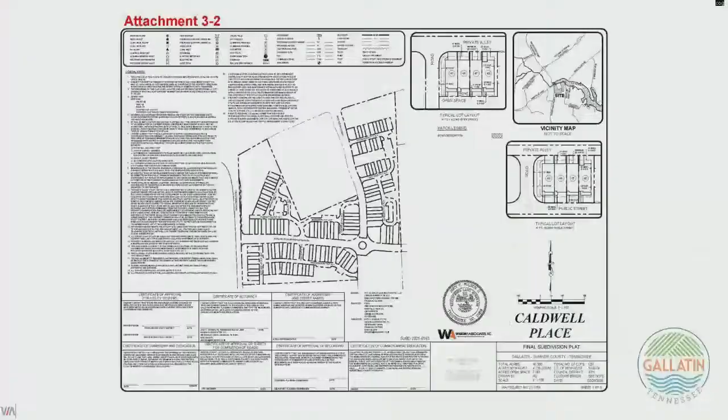Next, we will move to our regular agenda. This is item number 4, Bowman Massey annexation. Who has this one? I do. Thanks, Jillian. Yes, the owner and applicant request the Planning Commission recommend approval to the City Council to annex 129 acres with a plan of services. This is located west of Brights Lane and north of Roundtree Drive.

This property is along Broadway and is directly adjacent to Brights Lane. This property is contiguous to the current city limits based on when the Gregory property came in a few months back. The applicant is requesting annexation of the old family farm. The survey will be revised along Brights Lane to not include land directly around that and the creek, due to the urban growth boundary location. The city cannot annex outside of that area, so we're ensuring that's not included in this survey. I believe I received an updated survey just this afternoon, so we'll make sure that is updated for City Council.

Okay, this item will have a public hearing, and it will go to City Council following your recommendation. Thank you. Thanks, Jillian. Does engineering have anything to add? No comments from engineering. Thank you. At this time, we will open up a public hearing on agenda item number 4.

I'm representing the property, and if there's a question about where the urban growth boundary is, I don't know why it doesn't go up to the road, why it goes to the middle of the creek, because you're not going to develop into the creek, and we own the property on the other side of it. So take a look at where the urban growth boundary actually is and where it goes, and it would probably resolve a lot of your issues on that one. But nothing has changed from the last time this came up.

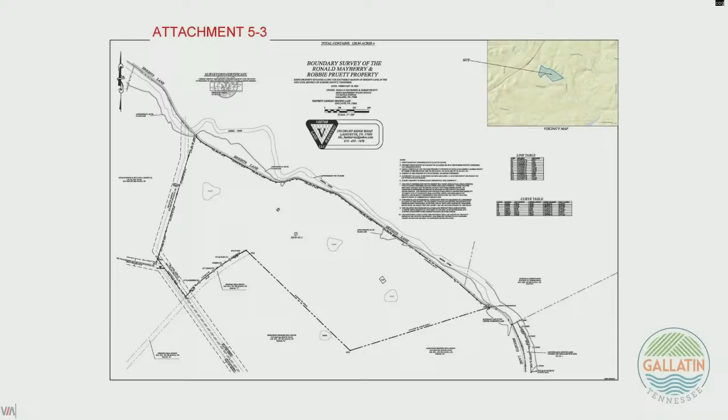Yes, sir, awesome. Jillian, does this one have a similar condition as the last one? It does not, because the creek doesn't come onto this property. Okay, so this one has no conditions.

Does the commission have any questions for the applicant? Motion, we have a motion for approval. Do we have a second? Second, we have a second from Tanner.

Again, like I said on the last one, this one falls in line with what we just did at the end of last year, so I'm also in favor of this. At this point, I will call for the vote. All those in favor, please say aye. Aye. All those opposed? Passes, thank you for your consideration.

Thank you very much.

Next, we will go to item number 6. This is Twin Ponds amended preliminary master development plan and final master development plan.

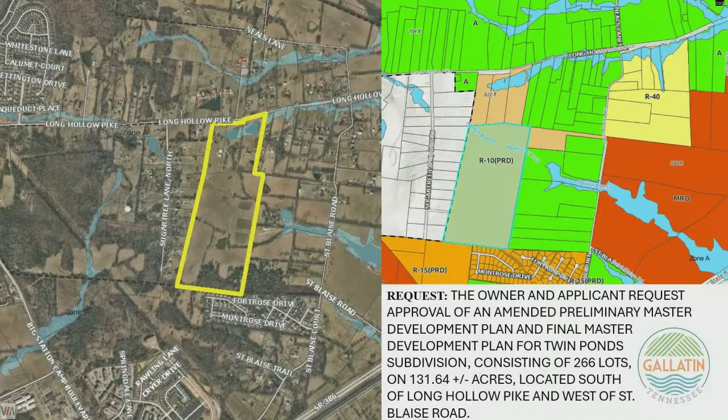Thank you, Mr. Chair. Jim Carpenter, staff planner. The owner and applicant request approval of an amended PMDP and FMDP for Twin Ponds subdivision on 131.64 acres, zoned R10 PRD, medium density residential planned residential development district, consisting of 266 single-family detached residential lots located south of Long Hollow Pike and west of St. Blaise Road. So the main change is these red shaded lots along Public Road A.

One of the conditions of approval for the PMDP was that lots fronting onto that road be side-loaded or rear-loaded. This current design has them as side-loaded, and so they need a little bit wider lot to accommodate the side-loaded development. It's an increase for these from 53 feet wide to 72 feet wide.

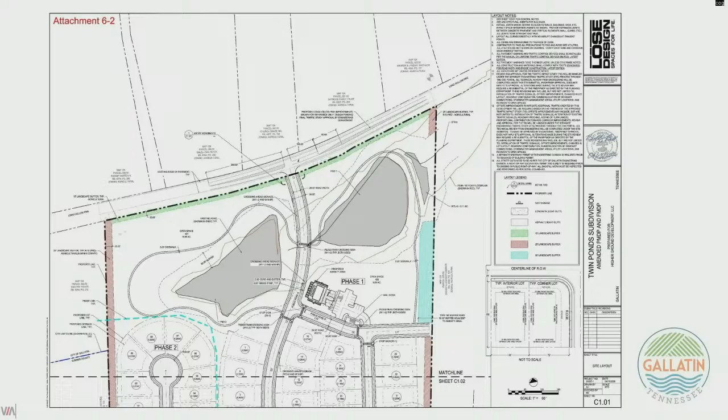One of the other comments we had: HVAC units cannot be located in side yards of less than 10 feet wide, that's a fire access issue. So they'll have to relocate the HVAC units to the rear of the properties.

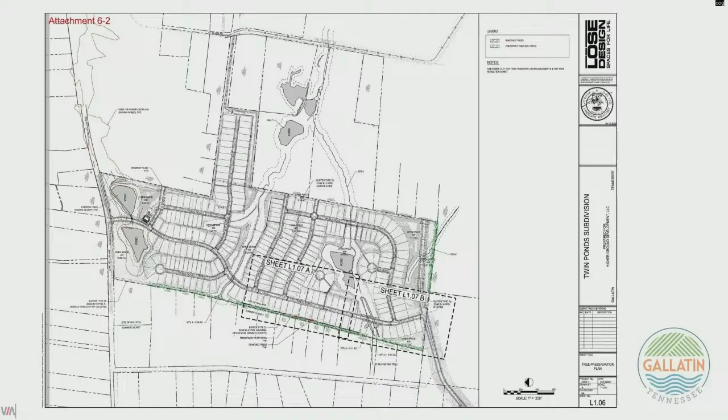Along with this, at work session we had just received the tree survey that day. So let's see if we can get this up. This is an overall tree survey for the west and southern property boundaries. They're showing about 490 trees, of those 11 are slated for removal, and it's very scattered, one here, one there. This is really the only spot where there's more than one in proximity.

And so the condition of approval from the PMDP said either retain the trees or place a berm. It's really not, from an engineering standpoint, feasible to put a berm for kind of one tree here, one tree there. So it appears that the applicant has gone down the route of trying to maintain the existing tree lines here.

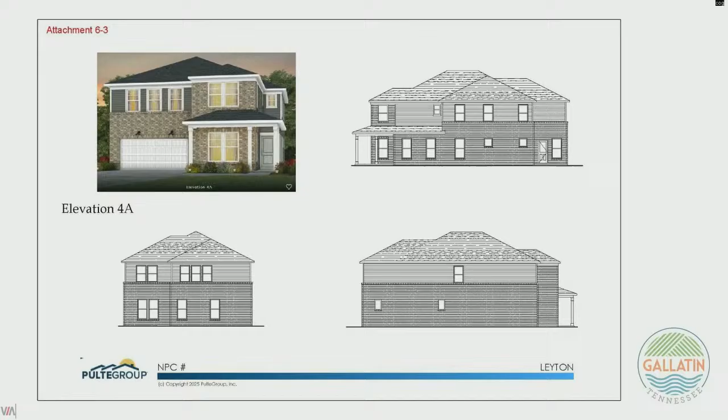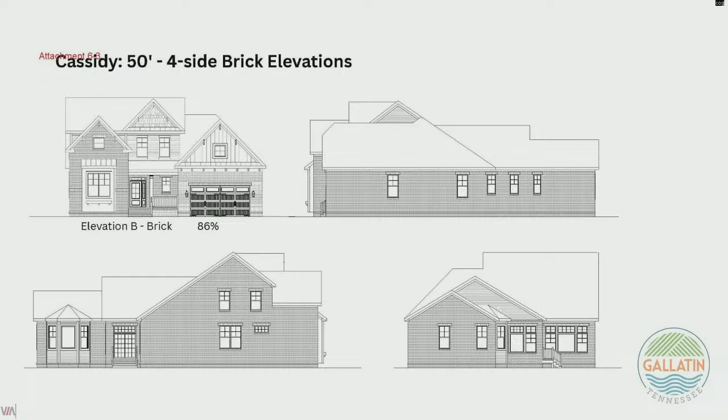Let's see, I talked about the architecture. So the plans indicate architecture that is consistent with the 70% brick stone approved with the PMDP. Any siding that will be on these units will be cementitious, so no vinyl, and there are some notes in there that call that out.

And then with that, since it is an amended PMDP, staff recommends that this be considered minor, since lots are getting wider and, in essence, it's providing a little bit more spacing. Our staff recommends approval of Resolution 2026-052 with 34 conditions.

Okay, and there will be public comment. Thanks, Jim. Engineering, would you like to add anything on this? Sure, so the traffic impact study has been all but approved. There will be some slight adjustments to what they're showing on Long Hollow Pike. Other than that, we'll see some ECPs, so we'll do a more thorough review at that point.

You said the traffic study is almost approved, basically. Basically, we're just waiting on signatures. Okay, all right, so this is a public hearing. Item number 6 is a public hearing as well, so at this time I'll open up a public hearing for those wishing to speak on this item. Please keep your comments to 3 minutes or less, it would be appreciated.

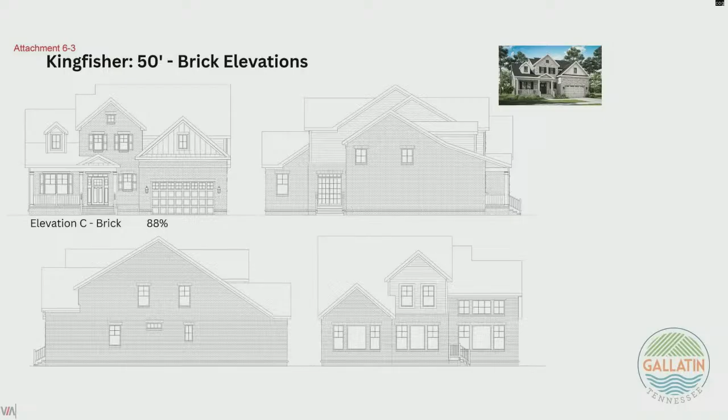Hello, James Mitchell. I live on 1041 Sugar Tree Lane. What is the starting date on this subdivision? Is there a starting date for the contractor?

So the plans say that they're going to start winter of this year, but it's winter of 2026 that's indicated on the plans. Okay, thanks Jim, all righty.

And I got something a little different I want to bring up. Why can't whoever raises the flag out in front of this place take it all the way to the top of the pole instead of having it 4 foot down from the top? Just something y'all need to talk about on that.

Okay, thank you sir. Is there anyone else wishing to speak on this item? Yes ma'am. Julie Poole, 1049 North Sugar Tree Lane.

Only thing I kind of want to talk about, we were nice, talked to the design engineer out there about some things we were concerned about. At the vote with the council, we brought up that Marty Cook got up and said that they were going to try to keep it where we couldn't see their houses, by doing the berm.

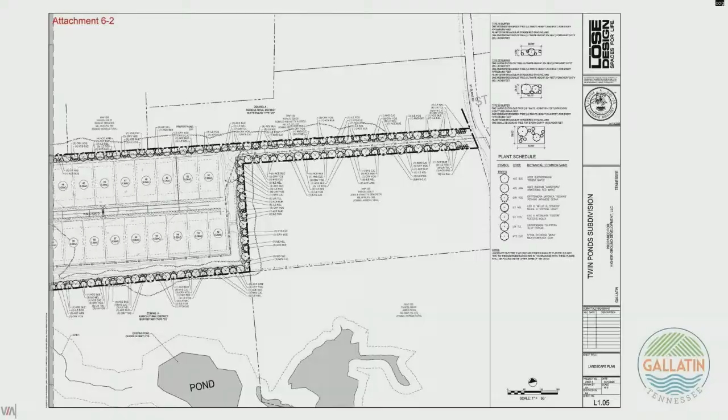As far as the tree survey, that was a condition during the city council process to look into, where applicable, a berm, retaining as many of the existing trees as possible. So what we had done was get a tree survey for the western and southern property lines, along Sugar Tree and then the St. Blaise Estates homes. We basically said, 10 feet onto our property we're just going to call it a no disturbance zone. So instead of being able to grade up to the property line, we're saying 10 feet from our property line we're not going to touch.

So that was the intent, and you can see it here: out of the 490 trees, 11 are coming down, so that's about 2%, doing quick math there. You were taking down 2% of the trees. And then behind that 10 feet is where we are disturbing.

We're then coming in with our proposed landscaping to provide more buffering there. And then I worked with Jillian a little bit on this one. I think the intent, correct me if I'm wrong Jillian, is anywhere there are currently openings is where they're going to really want us to emphasize the new buffering. Anywhere there's existing vegetation, we're hoping to utilize that as much as possible, and then come in with any additional buffering behind that.

Oh, and one more thing, because I know this was a hot topic through the approval process. As he said, a very small number of trees are having to be removed because they're dead or whatever. But I just want to reemphasize, the screening and the privacy is just as important to the developer as it is to the residents of Sugar Tree.

They're going to make a significant investment in both keeping the trees and adding landscaping where needed to make sure that screening's in place, because that goes both ways. The new residents buying these homes are going to want screening as well. So that's something very important, and the developer is committed to making that investment.

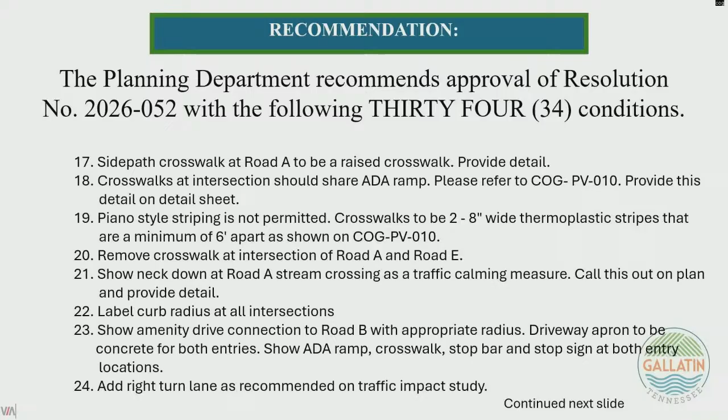Okay. So 16, 17, and 21 are all associated with Road A. Correct.

Engineering, do you guys see any issue with them working with y'all through the ECP process for that? I don't, necessarily, because I know Aaron and I have spoken about traffic calming a ton. They're still trying to figure out the best approach. There's also a discussion that has to occur with fire, to make sure multiple parties are happy with the calming measures. So that doesn't necessarily remove the condition, it just amends it for them to work with y'all through that construction document process. If you're comfortable with that, I don't see it being an issue.

Does the commission have any comments or rebuttals to that? If we remove it, how can we ensure they still comply? I don't think the request is to remove it. I think the request is for us to add language for them to work with engineering staff to come to a resolution on how they provide the traffic calming measure for the road.

Which is pretty much in line with some of the conditions we've seen on historical projects. So like on 16, it would be Road B, Road D, Road G, or work with engineering to come up with an alternate. That's how we'd prefer it to be written, as opposed to just striking them. I don't think we should strike them because the traffic calming needs to occur, but especially if there's additional discussion between the engineer and the engineering department, I think that's appropriate.

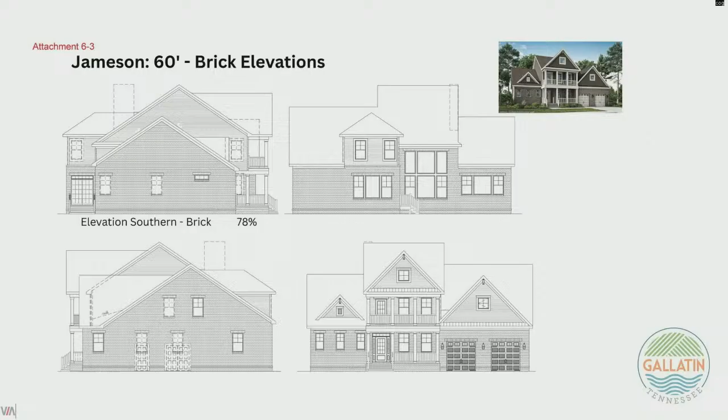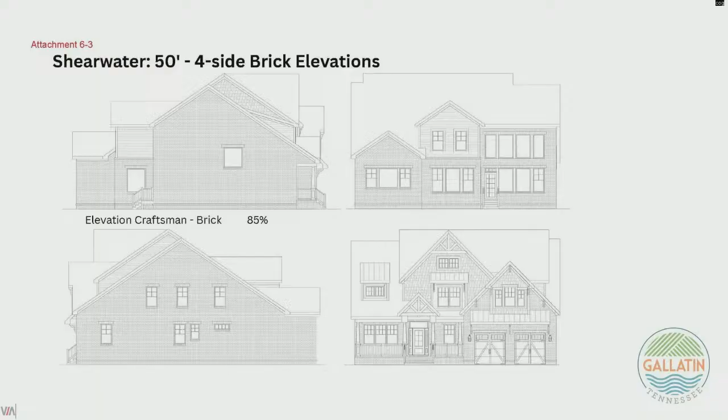It was just regarding the architecture for the side load products specifically. I know the previous submission had Pulte homes with the side load products, but I think the revised elevations now have Shell Brothers homes as a side load. Is that just how you guys had it, did you make a switch there, and was that the intent? Yeah, I don't think they're 100% certain on who it is, but currently Shell is providing the side load product. Okay, thank you, I just wanted that clarification, wanted to make sure we weren't missing some Pulte side load.

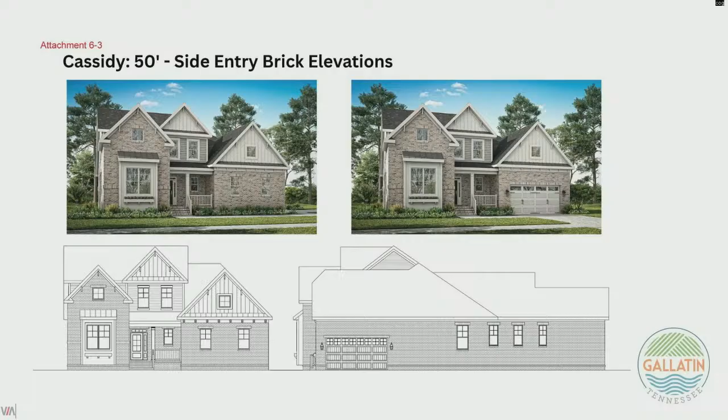But ultimately, from what I can see, they adhere to the requirements of the existing PMDP, correct? Correct, they did switch a lot of the materials to be brick and stone now, so they're meeting the 70% brick and stone requirement. After that, it's just a matter of making sure the submitted building plans match what's here. Thinking back, since this came through at the beginning of last year, when the previous project came through, were they meeting the brick and stone requirement at that time, Brian? They did, and it was a different builder they had originally submitted it with. We were excited, and then when we saw the previous submission for this application not having the brick and stone, we were slightly dismayed, but now that it's brought back to brick and stone, I think we're happy.

I did have one other question, brought up in the presentation about number 4 on the conditions, and that's the HVAC units not being on the side. Just wanted some clarification on that. Certainly understand the ordinance there, but wasn't sure whether there's any flexibility at all. It's important to these builders that they have a backyard outdoor living environment - that's a big thing for potential purchasers. Didn't know whether that was just hard and fast, or whether there could be staggered HVAC units if it's practical in certain places and still meet that requirement, or is that just absolute?

Yeah, that's a good question, Jim. Can you shed some light on that?

Yeah, so basically the zoning ordinance as written does not allow HVAC units in 5-foot side yard setbacks - anything smaller than 10 feet, yeah, can't have an HVAC unit in it. And that's for fire access to get to the back. 10 feet on each side is 20 feet. If you encroach 3 feet, 5 feet, you still have room to get back in case you have to get people out of the back of a building.

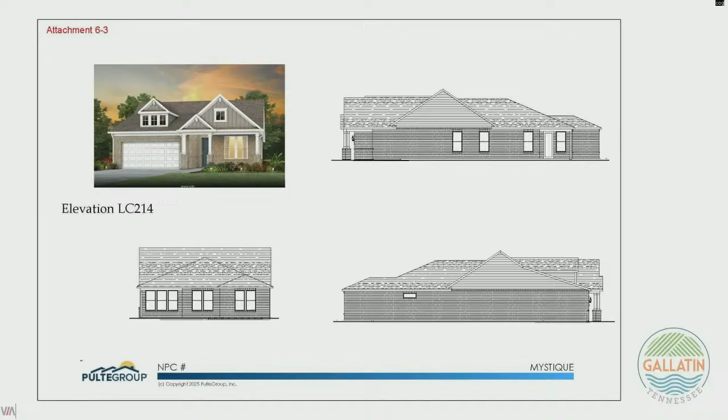Now we can entertain a motion on the actual item itself. All right, I will make a motion to approve and to amend conditions 16, 17, and 21 by adding a sentence at the end of each condition that says the applicant may work with engineering to come up with an alternative to meet this condition. Okay?

Second. Okay, so we have a motion and a second. Any discussion? Steve, you got anything? Sir? Okay. All those in favor, please say aye. Aye. All those opposed? Passes. Thank you. Yeah, thank you.

All right, next we have item number 7, the Crossroads of Gallatin Phase 1 amended preliminary master development plan. Charlie. Good evening, Commissioners. Charlie Fury, Staff Planner. The owner applicant is requesting approval of an amended preliminary master development plan for the Crossroads of Gallatin for Phase 1. This development is formerly known as the Chandler Marketplace Development. Phase 1 is going to be 17.14 acres and is zoned as PGC, Planned General Commercial, located north of Harris Lane and east of Greenlee Boulevard. This item will have a public comment period.

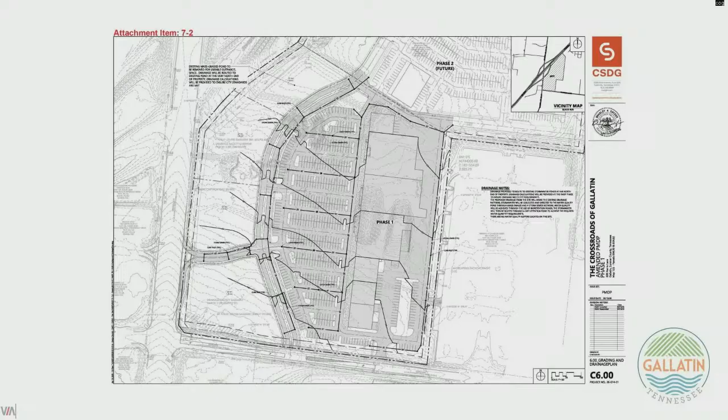Do you guys have any idea what's going at the corner there yet? At the hard corner? Yes, I do, I'm not able to disclose it today. I'm not asking for you to disclose it. But I guess my question is, would you have room for a wider sign, but not a taller sign?

I think so, yeah. Because in my opinion, us doing that would be in line with what we just did with Target.

It's a slightly different situation because I feel like this intersection is a lot more intimate than what's out in front of Target. I feel like there's a lot more open space in front of Target. So part of me feels like a wider sign would almost hurt sight lines to the actual building itself at the corner. So that's what I'm struggling with.

I think if we can get the same sign square footage but make it wider, and we could add some masonry elements to it, maybe some planters next to it, or as part of the actual sign with some landscaping on it, more of a master sign architectural design intent, I think the retailers would be open to that.

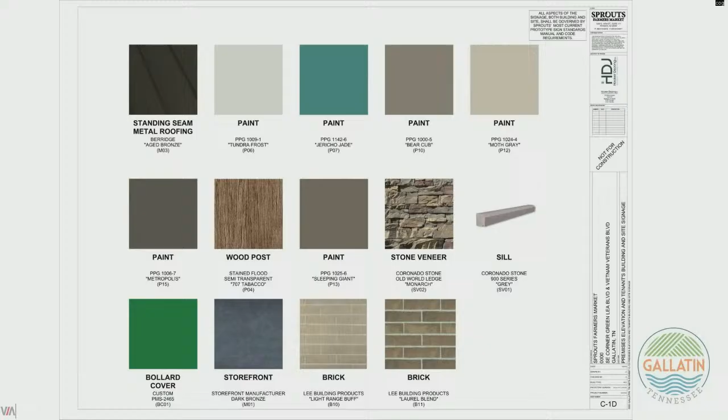Charlie, regarding condition 6, which says all monument signage shall meet the requirements of the Gallatin zoning ordinance, if you feel you'd like to deviate from that, you could say except for a so-and-so size sign at a specific location.

That's what I would propose. So knowing they have to come back with the FMDP, could we establish a height now but not necessarily a width, and let them come back to us at the FMDP with a revised or amended plan? You also could just make a statement at the end of number 6 saying an alternative sign package may be submitted with the FMDP.

But somehow you want to caveat that you're not approving the signs included in this packet per se. I'm just thinking out loud on how to phrase that, but leave it open-ended. That way they can come up with their design, and if it needs to be a certain size you haven't specified, they're back to asking for some other exception.

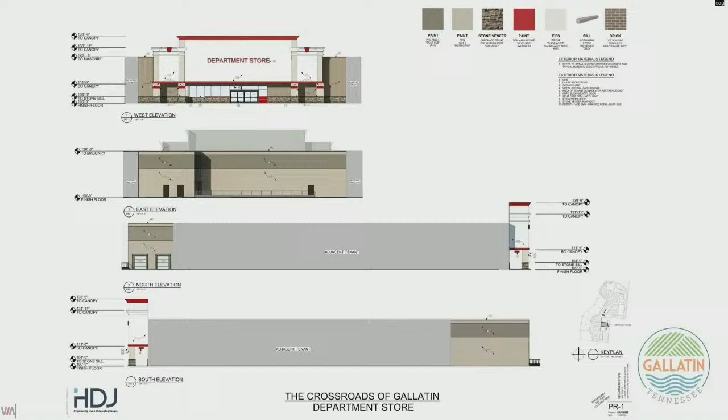I'm with Tiffany on this. I don't mind the height of the sign at B, but with the intersection I feel it's not as appropriate. If there's a height that could be set today, we can come back later and fine tune the design. I think that would be a decent path forward.

My comment today, if I was to establish a height, it would be 20 feet. For reference, typically the attachment height of a traffic signal mast arm is at 22 feet, so that's just kind of underneath there if we want to visualize it. I don't know the exact sign, but that's typically what it would look like, about the same height as where the mast arm is attached.

Would the 20 feet be for both signs C and B, or just for C? I think if I'm picking today, it would just be for C. I'm okay with the height of the sign at B, because of the proximity to the interstate I think it makes sense, and there's some grade change there anyway.

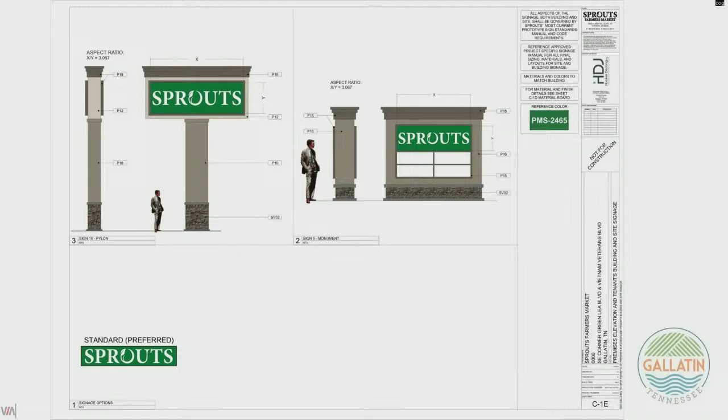Do y'all agree? And just to confirm, D is a lower sign as well, right? Yeah, D is just a normal monument sign, correct? Correct. Okay, and then we're removing A? Correct. Okay, I think we got the signs figured out.

Mitchell, can you shed some light on the mid-block crossing you mentioned earlier? Yeah, on Harris Lane. Tiffany brought up at the work session the Gallatin Commons Apartment Complex on the south side of Harris Lane, to provide a mid-block crossing so residents can walk up. Oh, a pedestrian crossing. I was wondering if the boulevard there lines up with the entrance to the apartments. No, one of them doesn't.

But it would cross the street and they would use the sidewalk at least, on the north side of the road, instead of expecting them to go to the signal, since we know that's not going to happen. At least make a marked crosswalk somewhere they can hopefully utilize.

And you said no traffic study has been submitted at this time, or was one submitted with the original proposal back in 2020? I don't know about that. Aaron's shaking his head yes. There you go, but we just haven't received an amended one. Correct, and that's not required at the PMDP level, but we would receive one before FMDP comes to us. That's right.

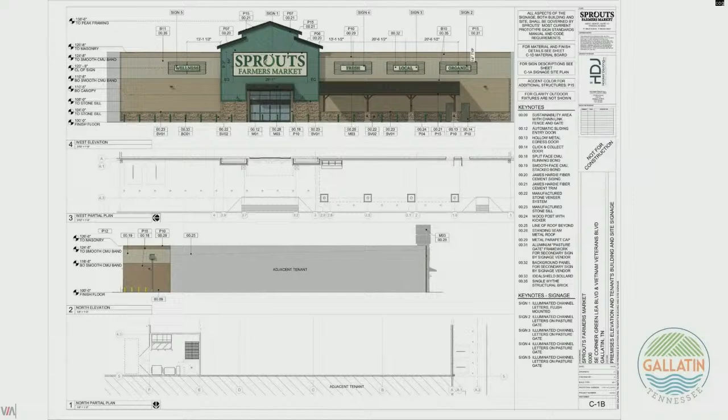So, I guess we can talk about minor or major. In my opinion, yes, I realize it's a different layout, but I feel like with the access points being the same, the use being the same, and they're not requesting a base zoning change, I'm inclined to say that this is a minor amendment to the PMDP. They're not drastically changing the use. It was already intended to be retail restaurant use. I'm assuming the out parcels would be restaurant retail uses. That's correct, yep, both sit-down and fast casual restaurants.

With that being said, I'll make a motion that this be a minor amendment to the PMDP. Second. Okay, so we have a second from Tiffany. Any discussion on that motion and second? You good, Tina? Good, Steve? Okay, all those in favor, please say aye. Aye. All those opposed? So it's a minor amendment.

I guess we can finish discussing condition 3. Sorry. I know that this is very typical construction for... yes, ma'am?

Rosemary Bates, Economic Development Agency. One of the previous stipulations for this property, which I am asking and making sure is going away with this approval, was to have a hotel on the property before any of those apartments could be built. But since they're foregoing apartments, which everybody should be very happy about, I want to make sure that requirement goes away with the approval of whatever you approve here.

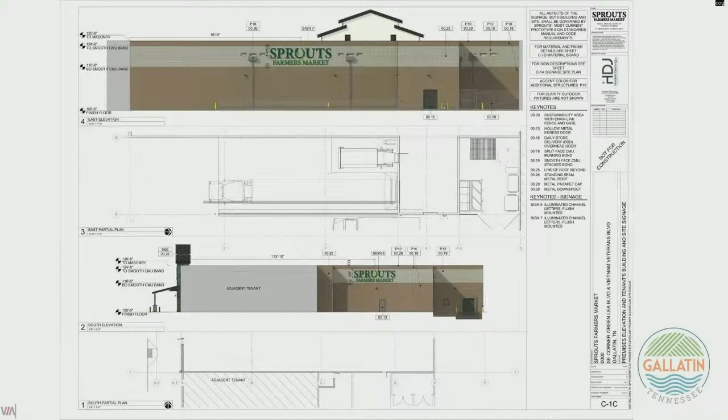I guess we were discussing condition 3. Very typical construction. It sounds like they've already enhanced their architecture some from the work session on the fronts. The only thing I would add is that if I had to amend the condition, I would say fronts meet the 70% brick or stone, or any facade that faces a public street.

So are y'all comfortable with that? Yes, sir. Or your parking areas too? Yeah, but you have parking areas in the rear of the buildings. Well, I'm thinking about the south side, where there is parking that faces that side of the building, right there, that faces the right of way. That south edge faces Harris Lane.

So that would have to meet it. You're talking about the back that's facing east? No, I was talking about that side facing Harris. So if it faces Harris or Green Lea, or Vietnam Vets. So really just the rear. I'm okay with the rear being the facade that they've proposed, but if it's a side that faces a public street, it should meet the 70% brick or stone.

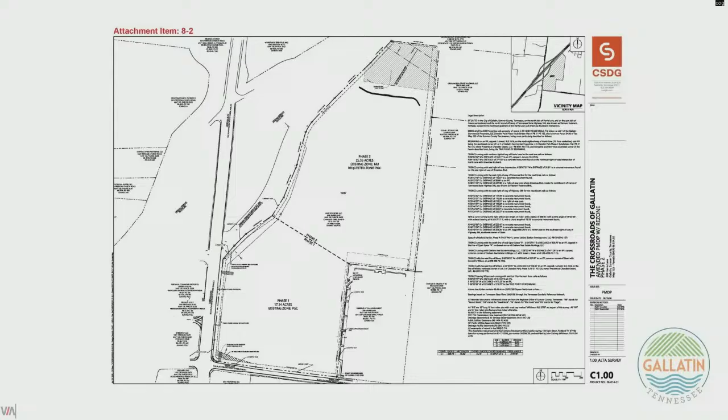For Phase 2, we're talking about the northern half of this property currently zoned MU. With the previous master development plan, the proposal was for multifamily residential apartment uses. The applicant is now proposing a continuation of what they're doing in Phase 1, a mixed commercial multi-tenant retail center with outparcels that will require their own FMDP as they develop.

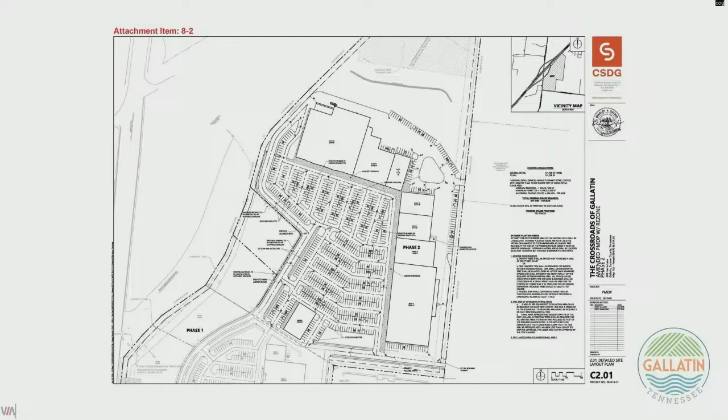Pedestrian connections will continue along the access road coming from Harris Lane, and this northern phase will be accessed from a future road along the south when the surrounding parcels develop. Stormwater infrastructure for Phase 2 will also follow suit with Phase 1, going to a detention pond on the very north side of the property.

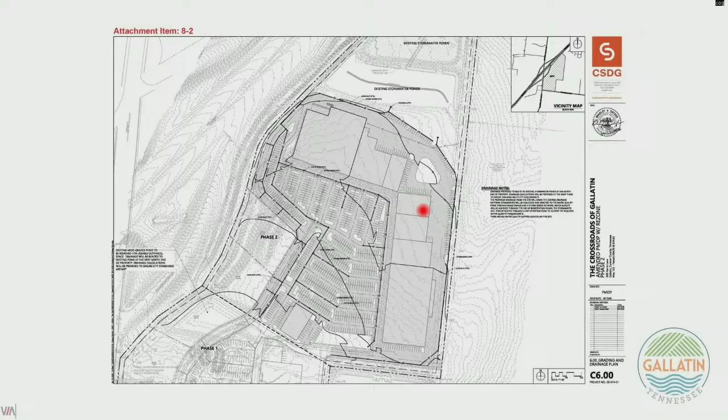We already talked about signage. Each tenant in the center will have their own signage, which will have to be approved per the standards of the Gallatin zoning ordinance. A landscaping buffer yard, type 20, is again proposed around the perimeter. PGC landscaping standards will still apply, and interior planting areas on the parking lots will also apply.

Architecture for Phase 2 is going to be similar to that of Phase 1, again revised from a submittal on Friday, with an improvement on the amount of brick and masonry materials with CMU brick and metal facades. The applicant will be requesting an alternate architecture plan for this as well.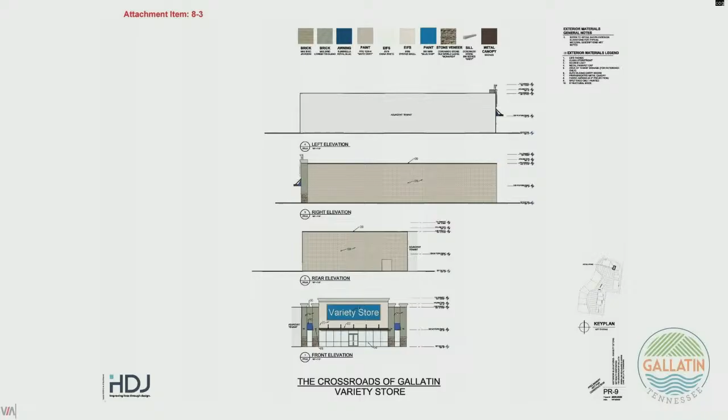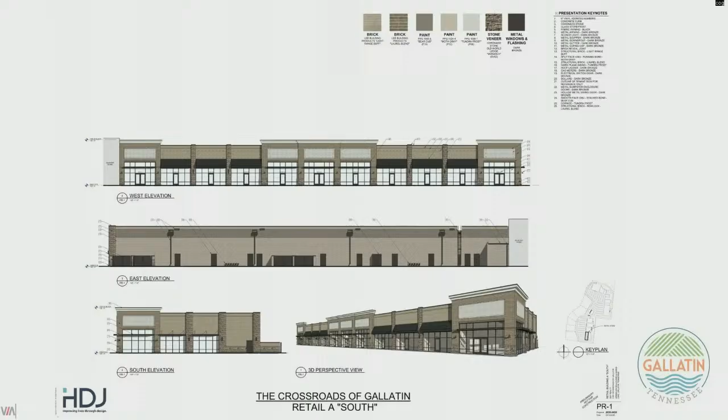For Phase 2, the zoning is going to be changing on this property, and so will the intensity of the uses and the uses themselves. So when that happens, it'll automatically go to major amendment. That is staff's recommendation, and with this rezoning it'll also move on to City Council after this. There is no public comment for this item. Planning staff recommends approval of Resolution 2026-054 with 15 conditions.

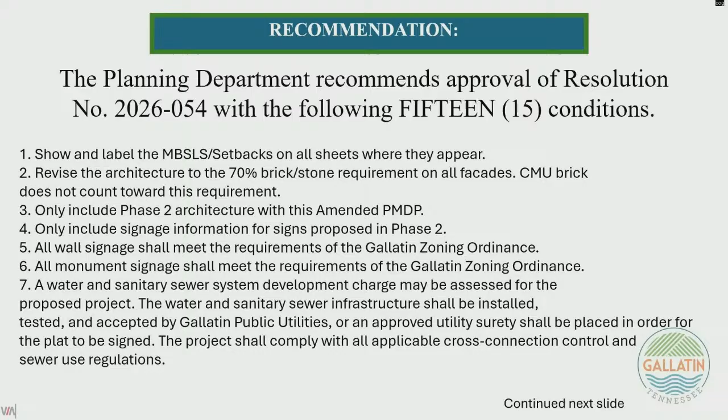Thanks, Charlie. Engineering, do y'all have anything to add? No major comments from engineering. Okay, thank you. At this time, we'll open up a public hearing on item number 8.

Seeing no one wishing to speak, we'll close the public hearing, and we'll call for the applicant again.

Tim Mondello, GBT Realty. Phase 2, approximately 140,000 square feet, a sporting good anchored portion of the shopping center, craft stores, soft goods, as well as sit-down restaurants. Welcome any questions. Thank you. Okay, thank you.

I guess a question for staff. I know we discussed at length about the signs for Phase 1. You're removing the sign in Phase 2 at location A. So do we need to... I guess your condition is to only include signage information for signs proposed in Phase 2, so that could remain. Okay, so we don't have to amend that.

And then I know you agreed to this in Phase 1, but in Phase 2, do you agree with the 70% brick and stone on the front and side facing public right of way? Yes. I guess that building at the top left is rotated to a point where you can technically visibly see it. In my opinion, the left side of the building should meet 70% brick or stone, but the rear of the building I don't think needs to meet it.

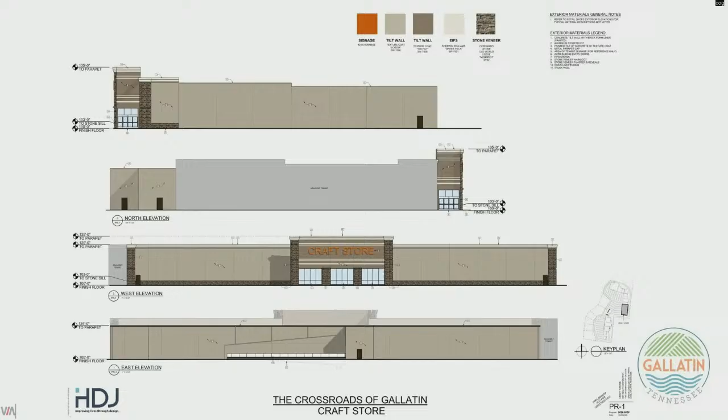Yeah, that makes sense. Because I think, staff, you would consider, if you look at the left side of the building, that would be the front—that front's 386. Okay. Yeah, to answer your question?

Yeah. Okay, seeing no more discussion, call for the vote. All those in favor, please say aye. Aye. All those opposed? Okay, passes.

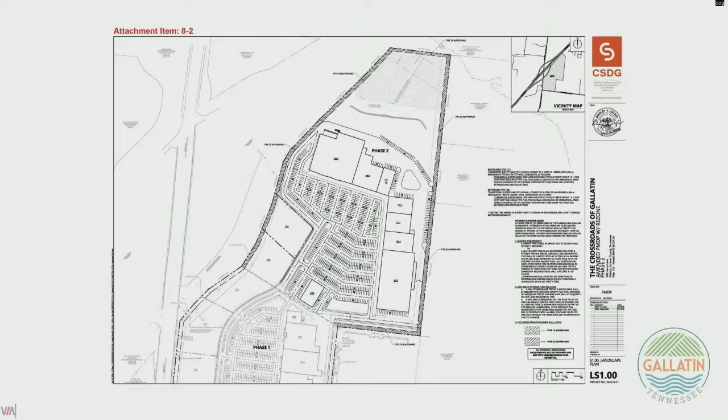Thank you. Number 9, Nexus. Okay, hold on one second.

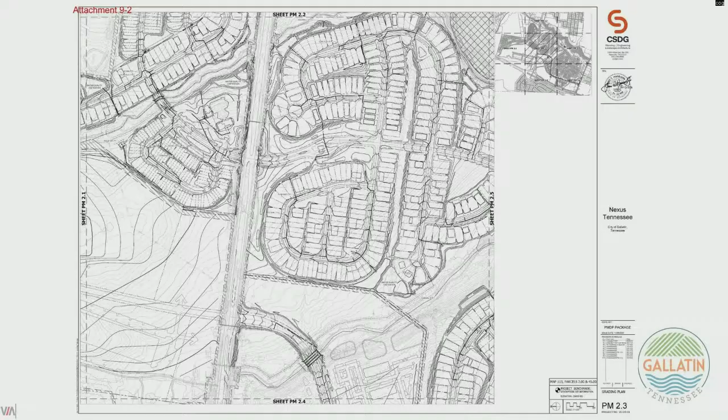Number 9, this is Nexus TN Amendment Number 6, rezoning with amended preliminary master development plan. The owner and applicant request approval to rezone 4.44 plus/minus acres from the R8 PRD medium density residential planned residential development district to the MU mixed use district, and rezone 5.25 plus/minus acres from the MU mixed use district to the PBP planned business park district, with an amended PMDP for Nexus, Tennessee, located south of Albert Gallatin and east of 109.

So probably the best place to start—this is the current approved PMDP. We're talking about this parcel here, and this parcel here, basically not just swapping zoning, but kind of swapping use.

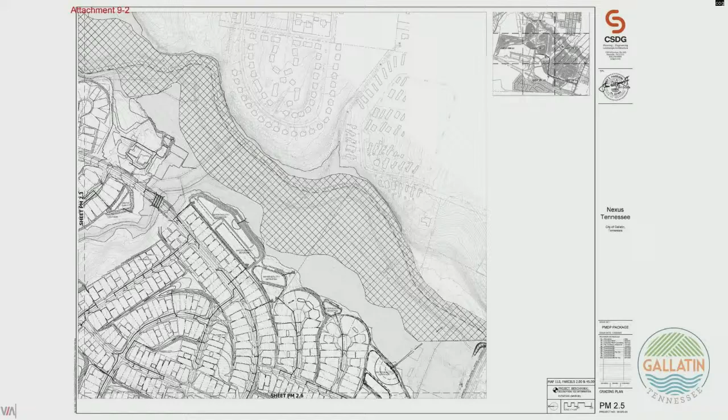All allowed MU uses for this would be applicable to the new zoning, and just like all things with Nexus, we are very conceptual with PMDPs. The specifics and the actual use would be laid out with the FMDP.

With the change, the applicant is still providing a minimum of 28% recreation area for the R8 PRD district. And with that, obviously this is a major amendment because it's going to council as a rezoning, but staff recommends approval of resolution 2026-055 with 5 conditions.

Thank you. Engineering, do y'all have anything to add? Nothing to add. Nope. Okay, thank you.

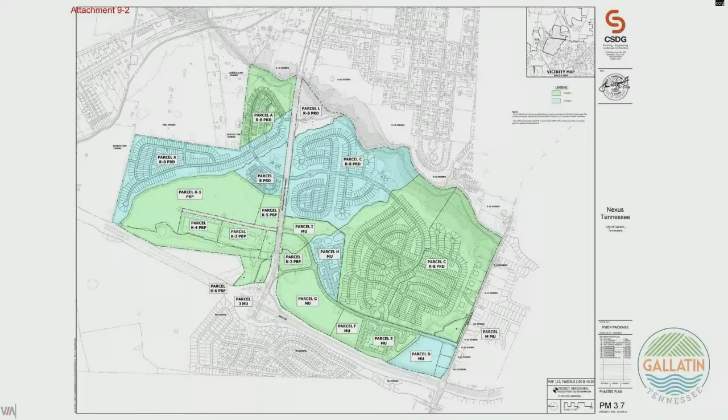At this time, we'll open up a public hearing for item number 9. Seeing no one wishing to speak, we'll close the public hearing and we'll call for the applicant to come forward.

Good evening, Chris Jansen with CSDG for the applicant. We're good with all conditions that were applied by staff and open to any questions that y'all have. Okay, thank you.

Commission, any questions, comments for the applicant or for staff? I don't see any issues with this. I think this is pretty straightforward. I think this makes sense. There's only 5 conditions. They all seem appropriate to me.

Entertain a motion. I make a motion to approve. Second. Okay, we have a motion and a second. Any discussion? Okay, all those in favor, please say aye. Aye. All those opposed? Passes.

Thank you. All right, next we've got item number 10. This is Southpark Gallatin Daycare Center, amended PMDP and revised FMDP.

Yes, the owner and applicant are requesting approval of an amended PMDP and revised FMDP. This has previously been used as a daycare center, and the applicant is requesting to add the limited retail sales use to the property. This would be a conditional use permit that this board could approve.

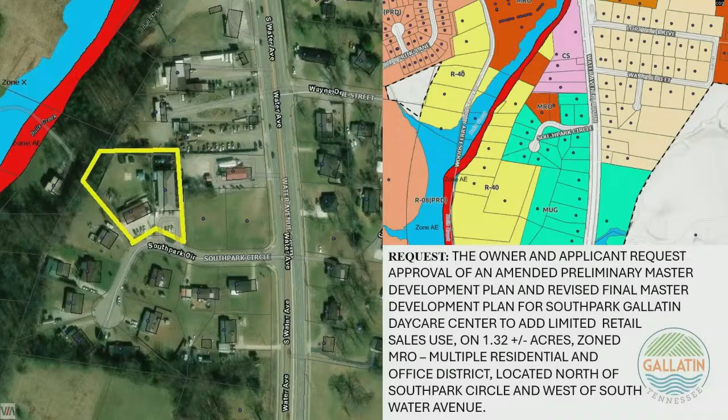Now we will vote on the item itself. I'll entertain a motion. Second. Motion and a second. Any discussion? Seeing none, I'll call for the vote. All those in favor, please say aye. Aye. Aye. All those opposed? Passes. Thank you.

Next, we will have number 11, the Banks Phase 1B Amenity Center, Final Master Development Plan.

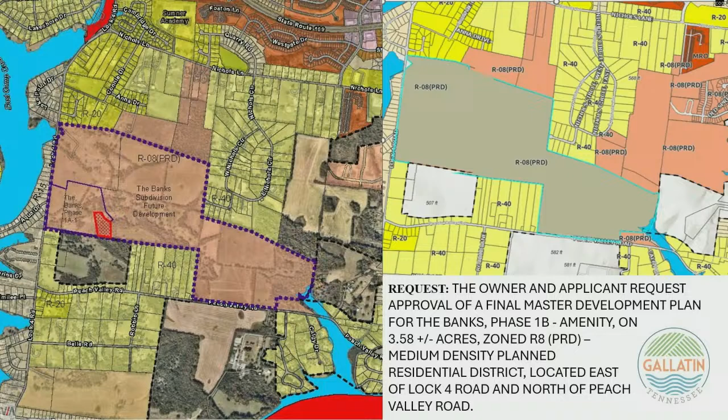The owner and applicant are requesting approval of an FMDP for the Bank's Phase 1B amenity center. This is the first amenity center for this project, just behind a phase that recently got final plat approval with the consent agenda. They are proposing a typical pool house building with a pool and various play courts and parking associated with that. Staff didn't have significant comments on this item, just very typical ones for an FMDP. Thank you.

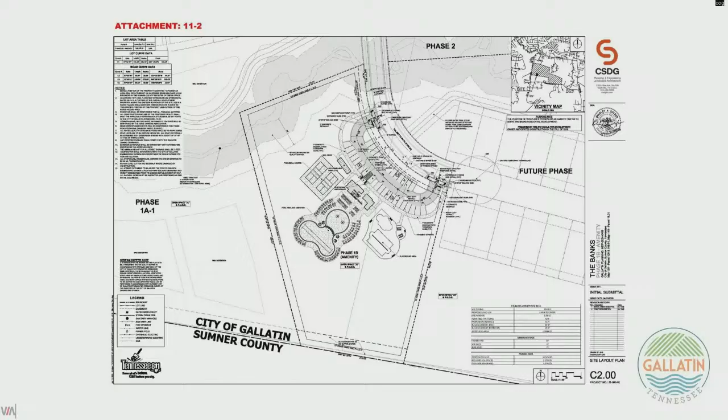Okay. So there's no public hearing on this one, so at this time we will call for the applicant to come forward. While they're coming forward, engineering, do you have anything to add on this? No, we have a few stormwater and site plan comments, but that can be addressed with the applicant.

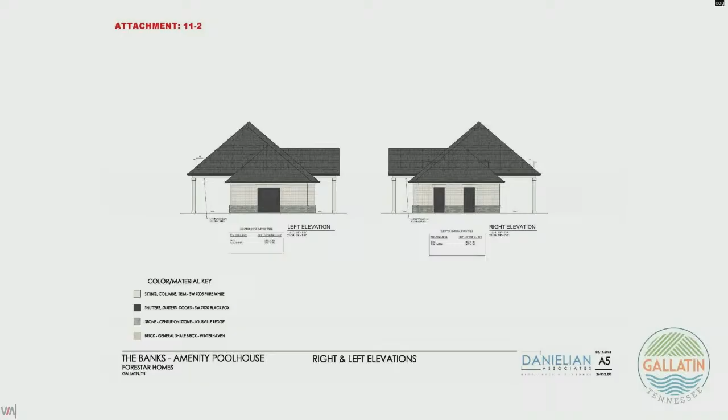Okay, awesome. Yes, sir. Good evening, Brad Snyder, CSDG. We agree to all of the staff conditions and are just here to answer any questions. Okay, yeah, this seems pretty straightforward to me. I will entertain a motion unless there's questions or comments for the applicant or staff.

Make a motion to approve? Okay, we have a motion, I'll second. Any discussion? Seeing none, all those in favor, please say aye. Aye. All those opposed? Passes. Thank you. Next, we'll go to item number 12.

This is the Bank's Phases 3, 7, and 8 Final Master Development Plan. The applicant's requesting approval of an FMDP for the Bank's phases 3, 7, and 8. This is approximately 114 acres and consists of 252 single-family lots, open space, public and private rights-of-way, greenway trails, native trails, and various other open spaces. This will connect the Bank's development all the way from Lock 4 to Peach Valley and connect into the Kirkpatrick development, now called the Harlow development, to the north. Staff had typical FMDP comments.

Okay, engineering, you have anything to add? Nothing more to add. We'll get ECPs, so we'll have a more thorough review at that time. Okay, awesome. Is the applicant present?

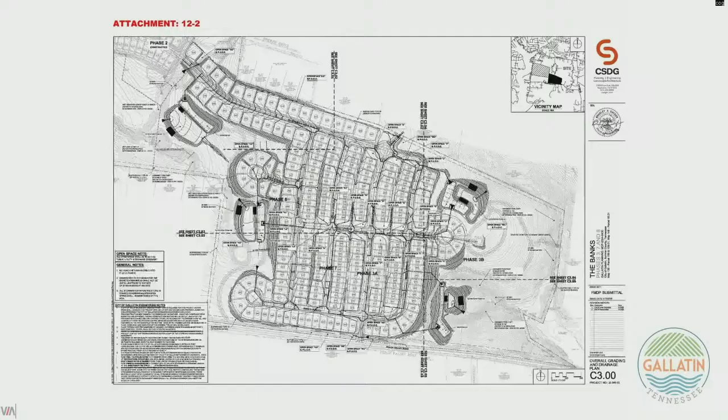Thank you. Thank you. Next, we have a project right next door.

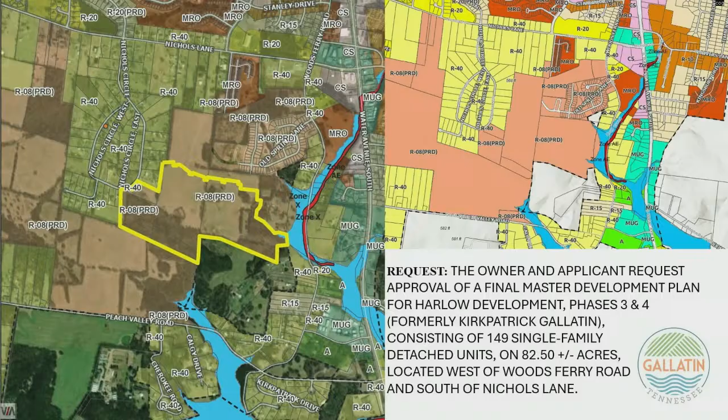Item number 13, Harlow Development Phases 3 and 4, Final Master Development Plan. This was previously known as the Kirkpatrick Gallatin development. Phases 1 and 2 have already gotten FMDP approval. This will connect this development into the bank's development to the south. This was for a little over 82 acres for 149 single-family lots. We had typical FMDP comments on this item as well.

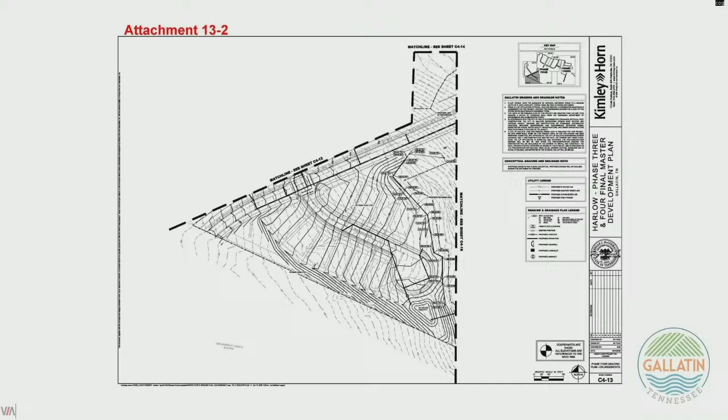Engineering, anything to add? Same thing, we'll get construction plans and have a more thorough review at that time, but nothing more to add. And then a traffic study was included with this at the PMDP level.

Is there a member from the applicant present? Keegan McCormick with Kimley Horn, here to answer any questions y'all may have. As you said, it's in accordance with the PMDP. Do you agree with all staff conditions? Yes.

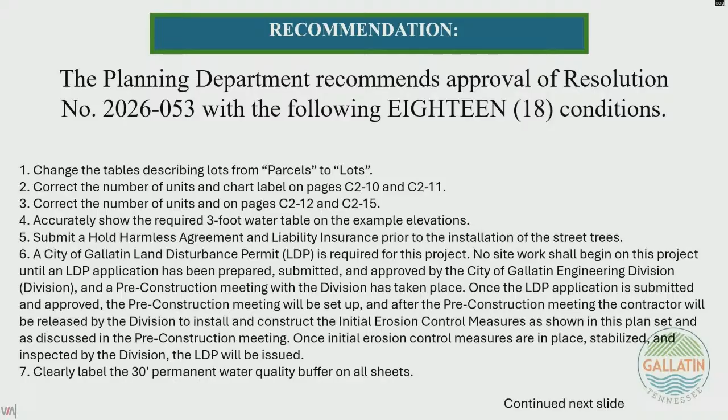Only thing I wanted to point out is that this one does have the raised concrete intersection we were talking about on number 3. I did notice that. I don't know if we want to look at that anymore - I know that was probably asked by staff. I just wanted to know, my assumption is that was a comment and y'all just went ahead and addressed it. Correct. Are y'all comfortable with the raised intersection? I have no issues with it. Is engineering comfortable with that? Yes.

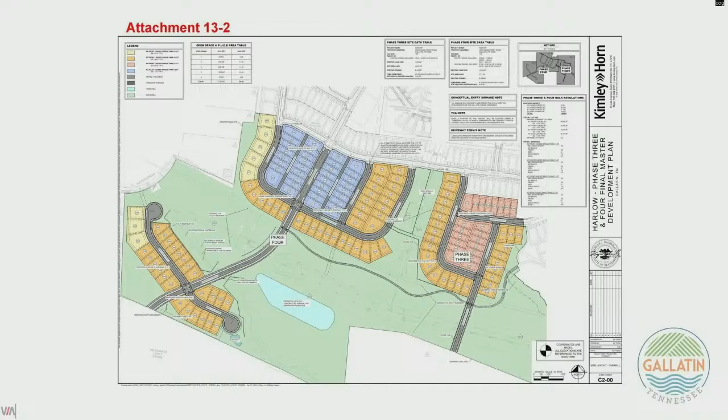Any other questions? Seeing none, I'll entertain a motion. Motion to approve with all staff conditions. Second by Steve. Any discussion? Seeing none, I'll call for the vote. All those in favor, please say aye. Aye. All those opposed? Passes. Thank you.

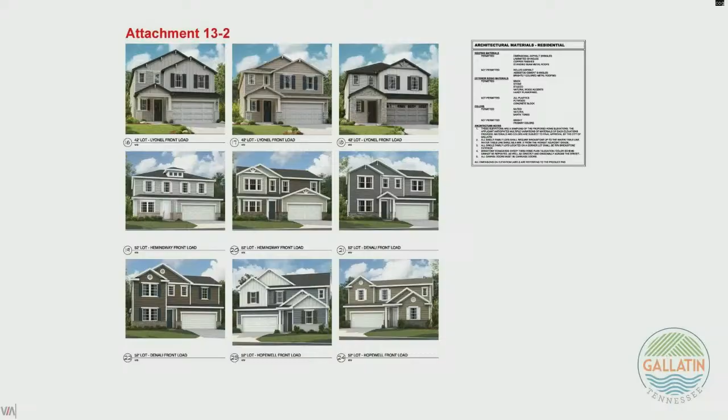Next, we will go to item number 14, Bledsoe Street FMDP. Item number 14 was withdrawn by the applicant before this meeting. Okay, awesome, so that's withdrawn.

The final item in our regular agenda is item number 15, Station Camp Track FMDP. The owner and applicant requests approval of a revised FMDP for Station Camp High School track building on a portion of a 123.4 acre parcel zoned MRO, multiple residential and office district, located south of Bison Trail and west of Big Station Camp Boulevard. This one's pretty simple - the owner and applicant are requesting to build a 2,400 square foot pole barn storage building, metal building, which will require alternate architecture anyways. But because of the zoning of Station Camp, that's why it is an FMDP.

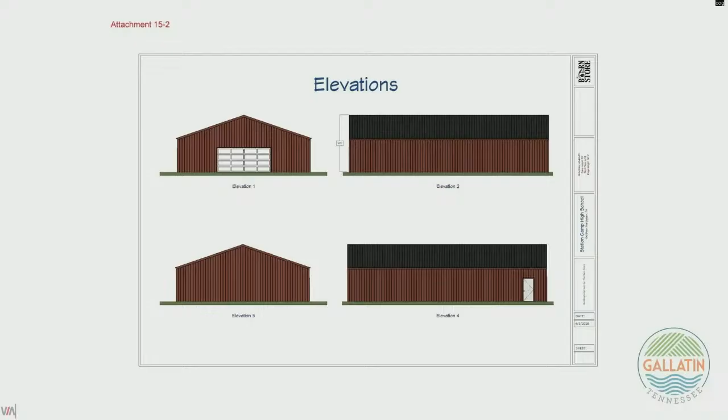So staff recommends approval of this with 5 conditions, and Don Long is here. No public hearing, so is there a representative from the applicant present?

My name's Don Long, I'm the senior project manager for Sumner County Schools. I oversee all of our new construction renovation projects and I'm trying to help the school get this building. They just got a new track and are looking somewhere to store their track equipment. Do you have any questions or comments for staff regarding the conditions? Do you agree with all the conditions? I've not even seen the conditions - what are they?

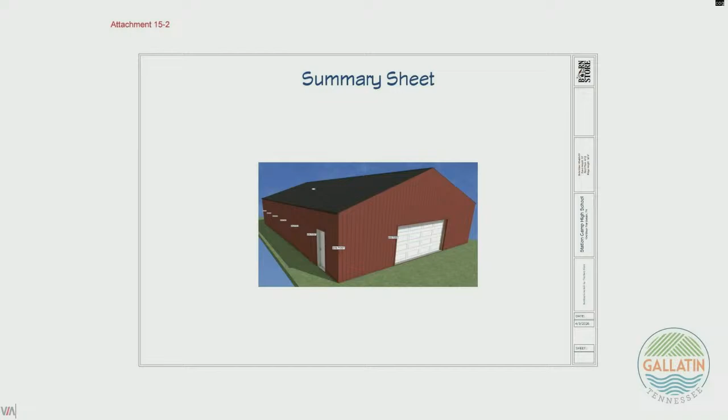So most of these are all very straightforward. The only one you may have a question on is item number 3. But engineering, correct me if I'm wrong - obviously with this building being 2,400 square feet, it would have to provide stormwater quality mitigation and quantity. Yes sir, quality and quantity. I'm assuming they'll just have to work with your department to get that captured.

Any questions there? I don't have any questions. I mean, we can do that - we don't have a civil engineer to calculate it, but... I know historically, with this being over 800 square feet, when we've done this where it's a shed on someone else's property, they have been allowed to utilize, I guess you can say, infill guidance with additional landscaping. Ryan, I don't know if you want to shed some light on that.

Sure, I can shed some light on that. This would kind of fall under the new infill permit that has been developed as part of the stormwater ordinance update at the end of last year. We don't quite have the permit in Intergov yet, but we're still operating under its regulation, and that would allow them to utilize something similar to Metro's regulations for infill to be able to design something like a rain garden or modified French drain without requiring an engineer, because it's designed through the Metro ordinance. Is that something your department's willing to assist them with? Yes. Okay, awesome, thank you.

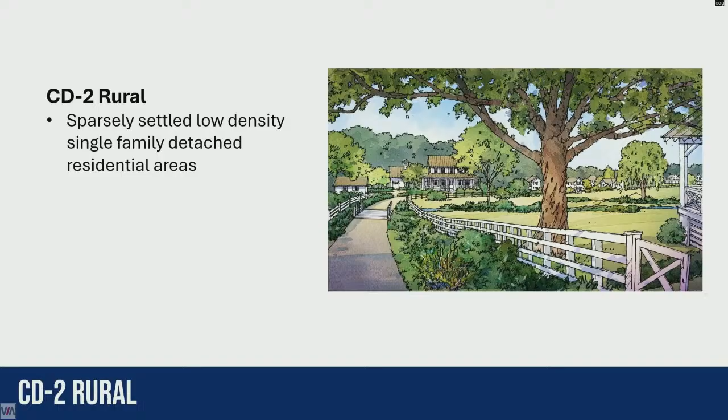So it's a little bit of a step up from 2A. Not as much agriculture, just more rural, low-density, single-family detached.

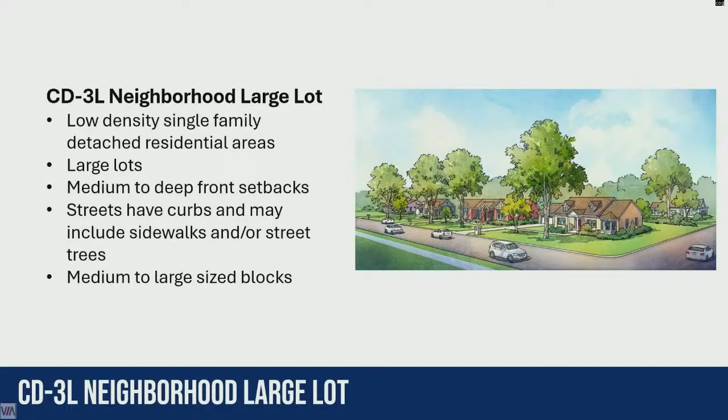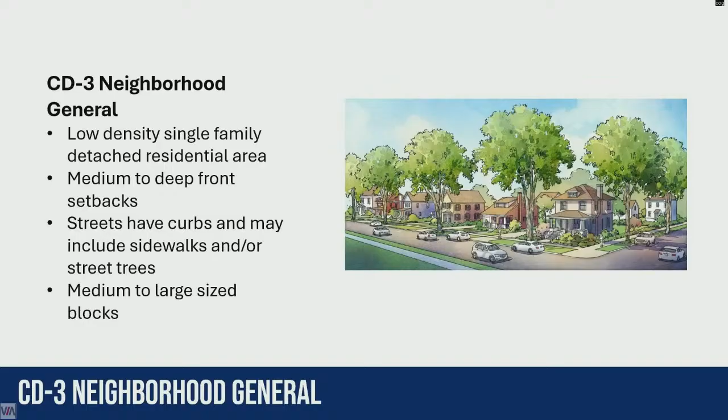CD3 is neighborhood general, so this is more like traditional residential, like what you might find outside of a historic district. Your lots are going to be a little bit smaller than 3L, but it's still mostly single-family detached. And the houses are going to be a little bit closer to the street than you would find in a 3L. The houses are also going to be a little bit closer to each other, and your blocks are still relatively big.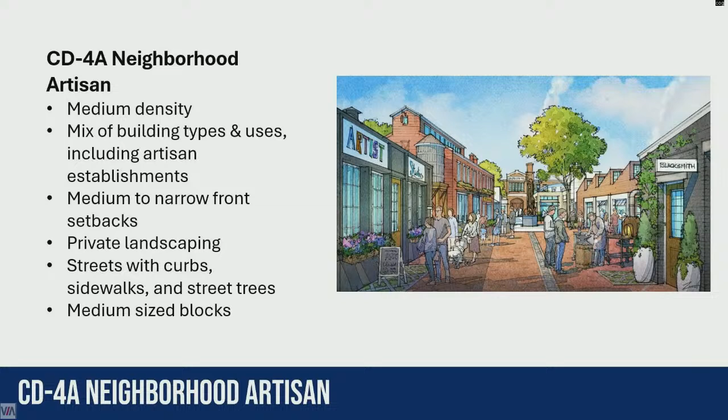CD4C is neighborhood corridor, so the C stands for corridor. It's typically more along your corridors, your highways, and more auto-oriented. This is where you'd find most of your big box.

There's no residential in this district, but you typically have big box further back, and then what we'd call liner buildings closer to the front to mask the large amounts of parking you may currently have. It's just a way to fill in the gaps and get rid of that massive sea of parking common in big box developments.

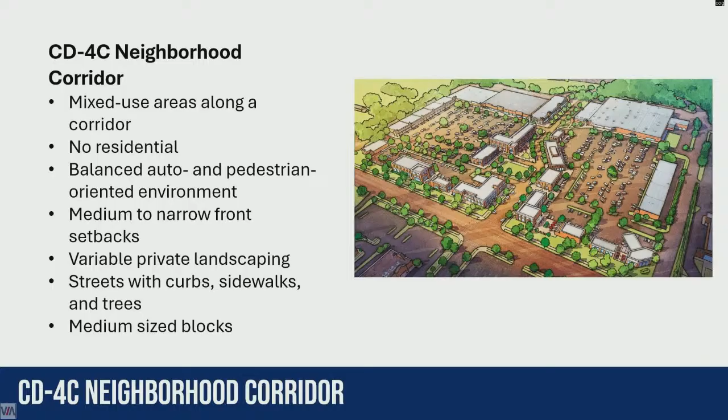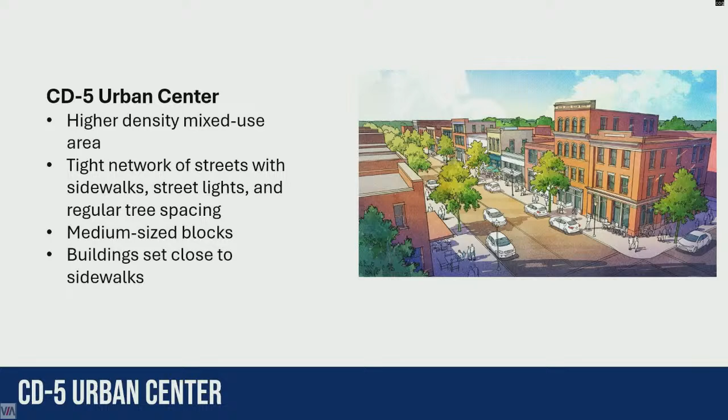CD5 is your downtown. So this is your highest density, a lot of different types of uses. You have a tight network of streets. The blocks are smaller and buildings are very, very close to the sidewalks.

And then civic, CDCV, is designated mostly for civic purposes and community facilities uses.

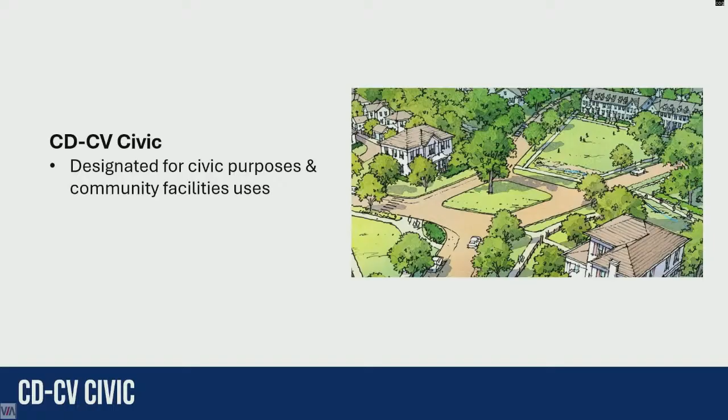We've also got an SDLIV, so this is a special district, light industrial village. It's kind of a combination of light industrial and some residential to create more of a workforce village where people can work and live within the same area.

And then you have your true industrial districts. These are pretty much brought forward from your existing ordinance, so we have restricted industrial and then heavy industrial.

And then lastly, we have overlay districts. Your historic district overlay is pretty much brought forward from your existing ordinance. Same with floodplain, I know there were some changes recently to that. Airport overlay is pretty much brought forward from what you currently have.

One new one we introduced is a rural conservation overlay. The idea is kind of a conservation subdivision where you may have more cluster development and then open areas left undeveloped. It requires a mix of the districts that I mentioned earlier.

Article 4 is kind of like the heart of this document. This is where all of your standards are for each of the districts that I just went through. It's kind of a quick reference guide.

Each district has about 10 to 12 or so pages with references to other places in the document, but this is where developers ideally should be able to open up what we call a multi-page table for a specific district they're interested in and know exactly what they can do in that district.

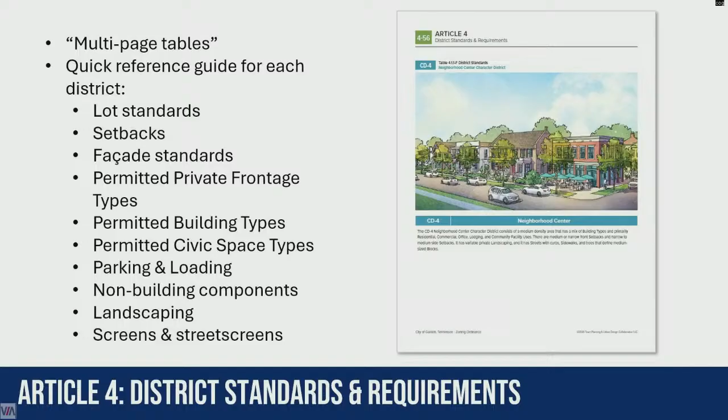So each of these multi-page tables covers your lot standards, setbacks, facade standards, private frontage types—I'll get into all of these things, but you can find all of these here.

Running through one of the multi-page tables, you can see how they're laid out. They start off with a description of the district and then a rendering. And then this is where you can find the density for that district, lot occupation, so lot width, lot area, which typically is not regulated in these.

Lot width is massively important for this code because that regulates the place. People understand a place from the street usually, and you can't easily tell what the size of a lot is, but you can tell how wide or how narrow it is. So that's where we focus a lot of our standards, lot width. It also makes a place more or less walkable.

You can also find setbacks here, private frontage types, which ones are allowed, which ones are not. Same with the building types, all your architectural standards.

When we say architectural standards too, these are pretty light. It's more so just glazing—how many windows should be on the facade, some building materials, no blank walls, things like that. You're not really getting into architectural styles, it's just pretty simple architectural standards.

Roof pitch, we also talk about that. And then we get into accessory building materials. There's a quick reference to the uses table because that's a whole other thing. Parking standards, where the parking can go in that district, loading and access standards. These are all quick references, and then they're discussed more in their own articles.

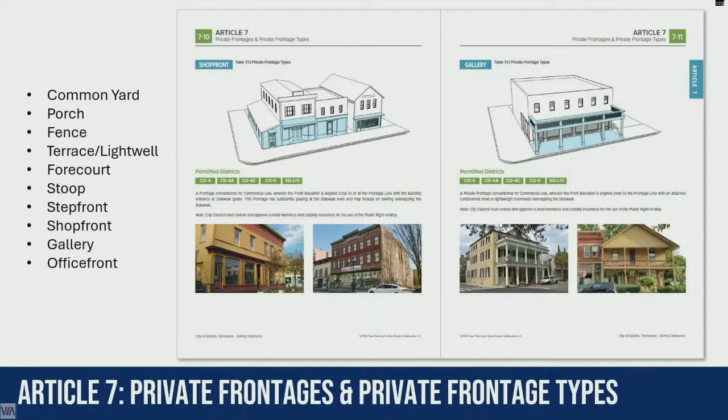As I mentioned earlier, this is a hybrid code, so there are some form-based standards. Being form-based partially, the frontage matters a lot - how people experience a place is they're standing on a street and looking at a building. So we have a bunch of different private frontage types, and they're contextual based on the district you're in. These are all the ones in the document, but they're allowed in different districts depending on what they are. A common yard you're not typically going to find in your CD5 downtown, but you would find a shop front in CD5. From the opposite, you wouldn't typically find a shop front in a CD3L because that's single family residential - just to give an example.

Article 8 is buildings and structures. This is where all those building types that I mentioned earlier are described, similar to the private frontage types. There are a lot of different building types you can use depending on what district you're in, but each one has a model to show what it looks like, a description, and some might have additional standards on top of those, but they're pretty light again. They also reference what private frontage works with that building type.

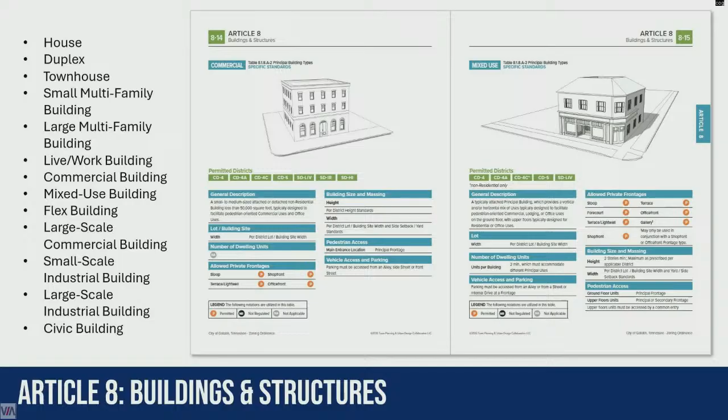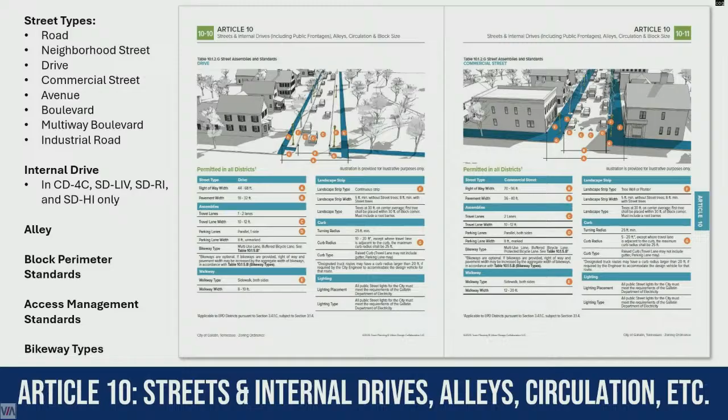There are provisions that talk about where drive-throughs and drive-ins can go, how many stacking spaces are required on those, bicycle parking accommodations, where the loading space goes, and where dumpsters and that sort of thing go. And they go in certain layers.

Then, just like all the other elements of the code, there are different civic spaces, and that's a nice word for open spaces. All civic spaces are open spaces, but all open spaces are not civic spaces. They're based on a range of contexts. Natural area being usable pretty much anywhere. Plazas are only going to be applicable in a more urbanized area because it's mostly a field of concrete or a field of pavers, and it's just a more urban civic type.

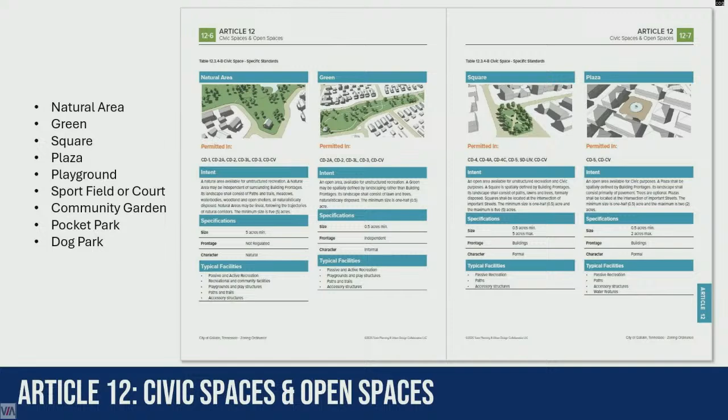The ones listed there down the side are what are in the code. And you even have a dog park. I'm not sure we've done a dog park before. We've thought about it. I'm a dog nut, she's a dog nut. But then somebody brought up there ought to be a dog park in here, and we addressed that, and we're glad we got a dog park.

The landscape article is Article 13. There's a requirement for a minimum landscape surface area in each of the districts. There's provisions about the overall required plantings, what native plant species are appropriate to use, the public frontage—again, the part of the thoroughfare that's there between the private lot line and the curb—what sorts of public tree shapes can go there. I don't think we specify the species so much there, but it's the shapes, and what sizes of trees need to be planted, when they're planted, and where they go.

We created a scenic street buffer, which there's some interest in—we heard all about it at the charrette, and then it continued to be something that interested people—where on these identified particular stretches of road, there are scenic buffer requirements for them, and they're in a table there. I know nobody likes to be compared to another nearby city, but I'll go ahead and say Franklin has these around a lot of its major roads, and it really holds a more rural feel if you can hang on to those, and there's something next to the pavement other than a building.

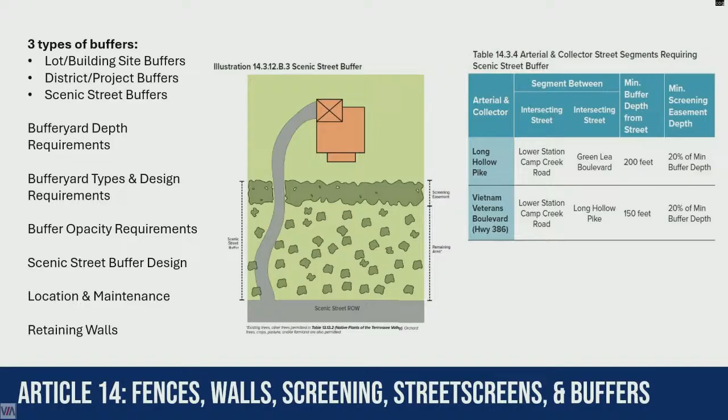A handy thing. There are other types of buffers that are required in the document—buffers that go between different lots or different building sites or uses, some that go between different districts or a whole project, so that it has a buffer around the perimeter. It goes into buffer opacity, and locating and maintaining them, and kind of what happens with retaining walls as well.

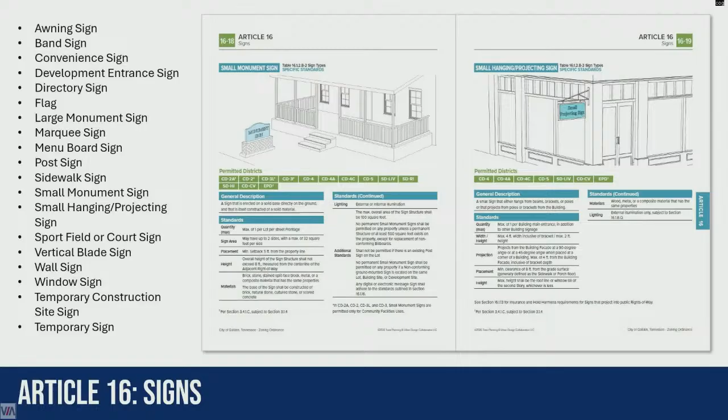We've got a sign article that gives you an incredible array of possibilities. Certain signs are appropriate in certain places, and so they vary also by context and by character district.

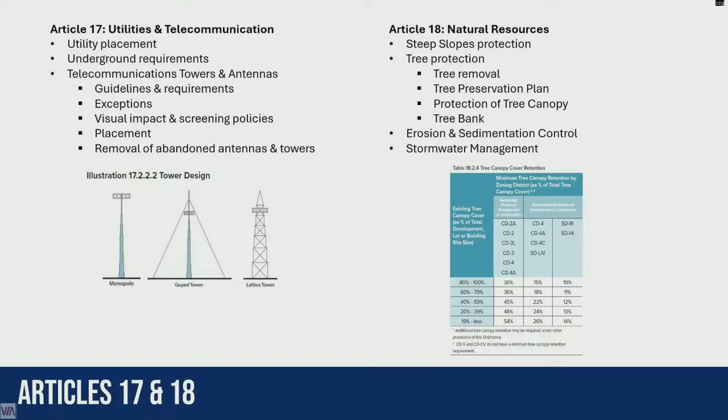There are provisions that we didn't do. We may have made it a little bit easier to see the provisions rather than it being really dense text so much, but Article 17 being utilities and telecommunication—we are not the experts that some other people are in telecommunications. And then Article 18 being the natural resources article that has steep slopes protection and tree protection, erosion and sedimentation control, and stormwater management.

We spent a good bit of time trying to make the administrative provisions and the procedural provisions just a little bit easier to follow—they're reorganized some. We haven't changed what's got to be done, but they were really dense and on first read they were hard to really follow for somebody. So we tried to spend some time cleaning those up.

And then the definitions. When you have a character-based code or a form-based code or a hybrid code, there are a lot of terms that are typical in conventional zoning, the older zoning, versus the form-based zoning. So you end up having to have a definitions article that has some of both in it, and actually sometimes has to call things out. The word frontage in a lot of city codes means how far it is from one side of a lot to another. That's not what we mean when we say it—we're talking about the private frontage and the public frontage. And so all of that has to be brought together and made clear when you're doing a hybrid code like this.

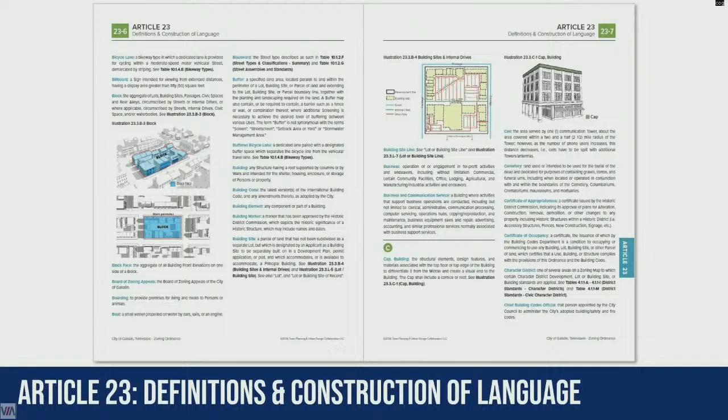We so hope y'all spent a lot of time mulling over the document. Is everybody nodding? So I think it was about 3 weeks ago we got the updated version. I personally went through every single page when we first got it, so I had quite a few comments. I know there was a bunch of people that had comments. Full transparency, I'm still reviewing this latest copy, but I think we've come a long way from where we started. I'm certainly excited about it moving towards adoption and us finally having something updated. I think it's been a long time coming.